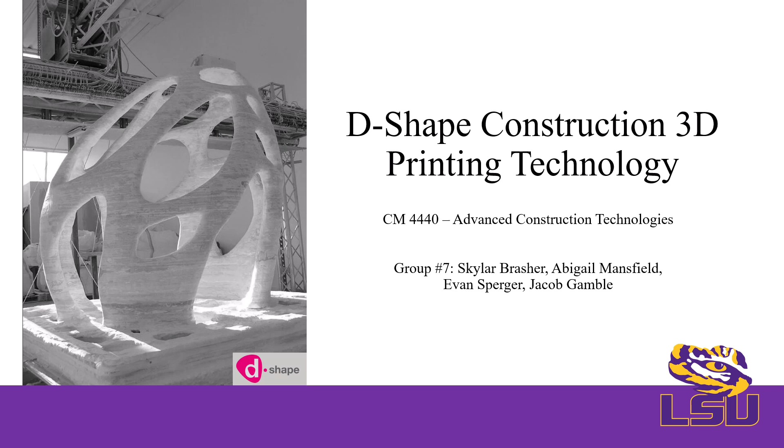Hi everybody, and welcome to D-Shape Construction 3D Printing Technology. This is a final presentation for CM4440, Advanced Construction Technologies. And this presentation is by group number 7, which includes Skylar Brasher, Abigail Mansfield, Evan Sperger, and Jacob Gamble. Let's jump right into it.

2006. The following year, 2007, Enrico printed the iconic Radiolaria Pavilion, the world's first 3D printed architectural structure. This marked a new era in construction technology. So Enrico would go on to showcase D-Shape's immense potential through a variety of visually stunning projects. I won't get too much into them because that'll be covered in a different section. But the applications are definitely varying, that you can use it in a variety of projects.

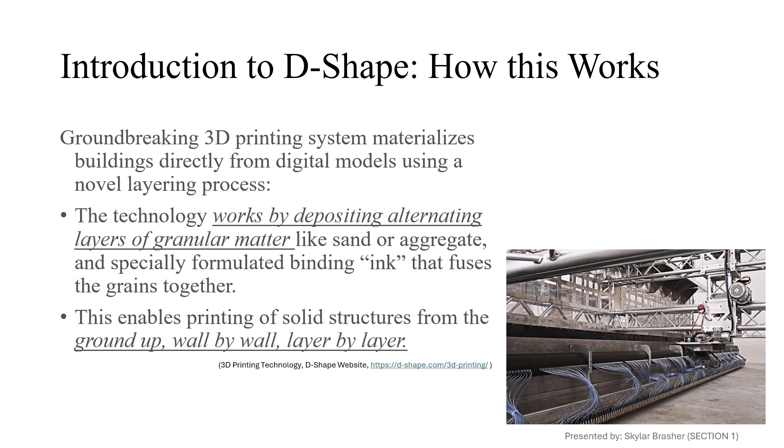I'm not sure if that's how this would work in the same way. But it does look like the bed has a specific technology in it that keeps the product from sticking to the bed. Very similar, just looks scaled up and it uses different materials, but I think that is definitely the basis of where this is coming from, or this could be the basis of the non-commercial one, but very similar.

While traditional 3D printers use tiny inkjet style binder jets, D-Shape's nozzles dispense small volume drops that rapidly bind large areas. This is due to the potency of the ink. You don't have to have a whole bunch of it for it to work well. Two robotic gantries work in sync, one precisely spreading each fresh layer of granular matter, so the sand and aggregate, the other following behind to print the binder patterns with the ink.

D-Shape is multi-material. It's compatible with a wide variety of aggregates, fibers, and customizable binder chemistries. This just means that we can go in and use specificity to try and find the right fit for the right project. Say that we're wanting something as a specific kind of aggregate for the project that we're doing, we can actually specify, pull it out, and use what we're wanting.

So this patented approach allows printing entire building structures in one seamless process. Complex shapes with fine details are no problem. This is due to the digital precision and design freedom. The printing progression is also self-supporting, removing the need for any temporary formwork. Again, going back to how non-commercial 3D printers work, I think this is very similar.

So say that it's something that's hollow and needs supports from the inside. With a non-commercial 3D printer, it would actually print the supports and make them where they're breakable. It would add a seam where it breaks off. At this level, at this scale, I'm not sure that it would work exactly the same, but I'm assuming that it would work very similarly.

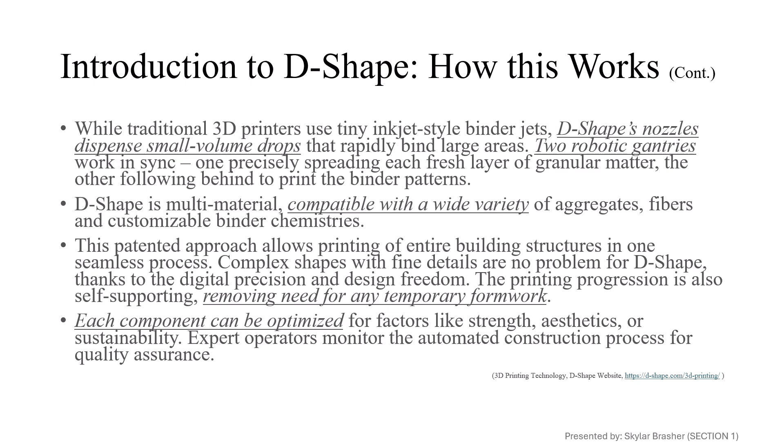Each component can be optimized for factors like strength, aesthetics, or sustainability. Again, going back to the variety of aggregates, fibers, and binder chemistries. Expert operators monitor the automated construction process for quality assurance. In this section, we'll be discussing the advantages and disadvantages associated with D-Shape 3D printing.

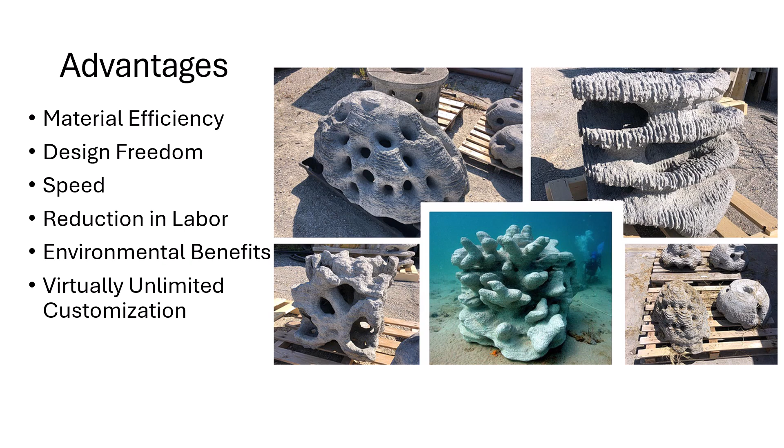Beginning with the advantages, we have material efficiency, design freedom, speed, reduction in labor, environmental benefits, and virtually unlimited customization. And to elaborate on these, beginning with material efficiency, only the necessary material is used. There's no need for any formwork or molds because the printing progression is self-supporting. In addition, it uses inexpensive natural materials such as sand or crushed stone, which can be optimized for strength, aesthetics, or sustainability.

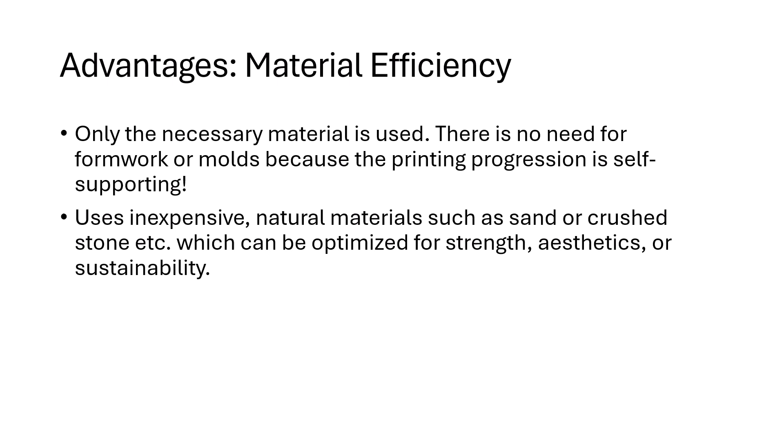Another advantage is the design freedom and customization. As you can see in the picture below, complex shapes can be created with ease. This leaves opportunity for architects and designers to create forms that would likely be impossible or at least very expensive using traditional methods.

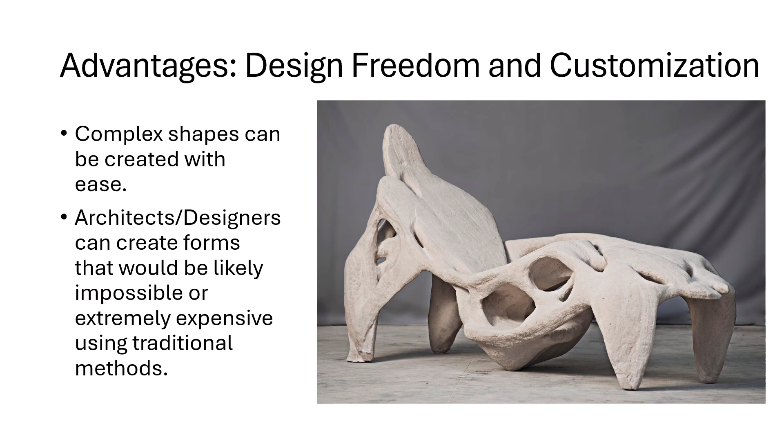Additionally, we have speed and reduction in labor. Along with the ability to create complex shapes and objects, large structures can be printed relatively quickly when compared against traditional masonry and concrete construction. Moreover, a single operator can operate the entire printing procedure, which requires significantly less manpower than traditional methods of concrete construction.

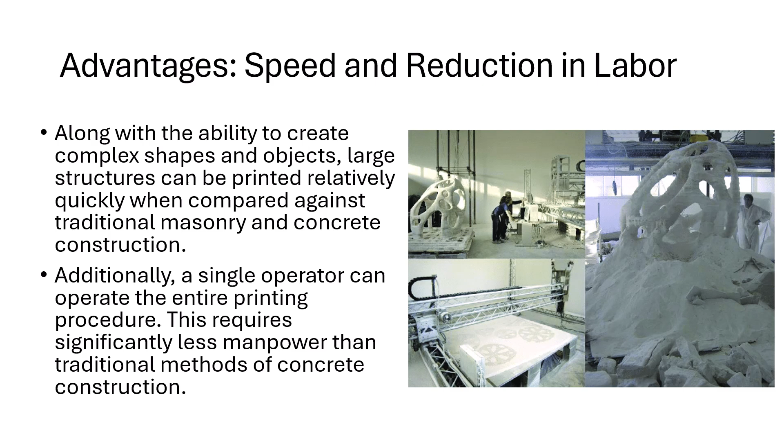Environmental benefits, such as reduction in material waste, less energy consumption, potential use for recycled materials, and less transportation impacts on the environment from carbon emissions, are another advantage of the D-Shape 3D printing process.

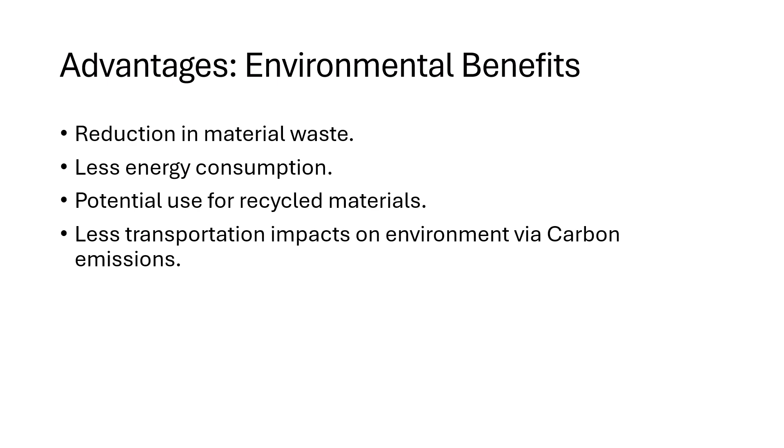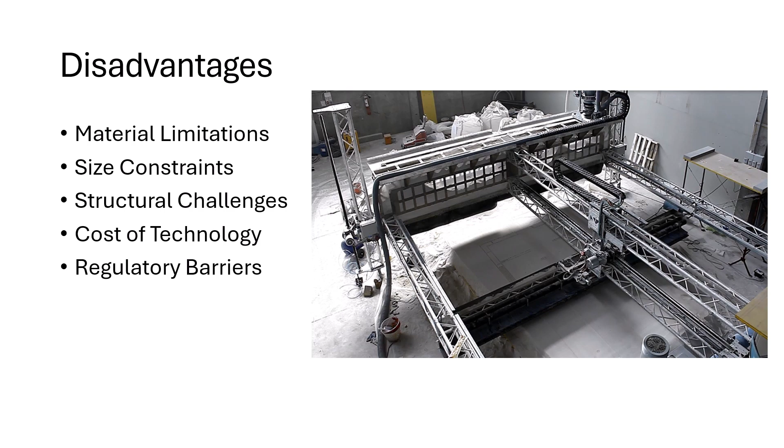Moving on to disadvantages, we have material limitations, size constraints, structural challenges, cost of technology, and regulatory barriers. With material limitations, this is a disadvantage because strength and durability depend on the binder and aggregate being used. Generally, this isn't as strong as traditional reinforced concrete, and this is due to the fact that there's no pre-mixing of the material and the liquid, which causes the components to bond differently than a typical concrete paste.

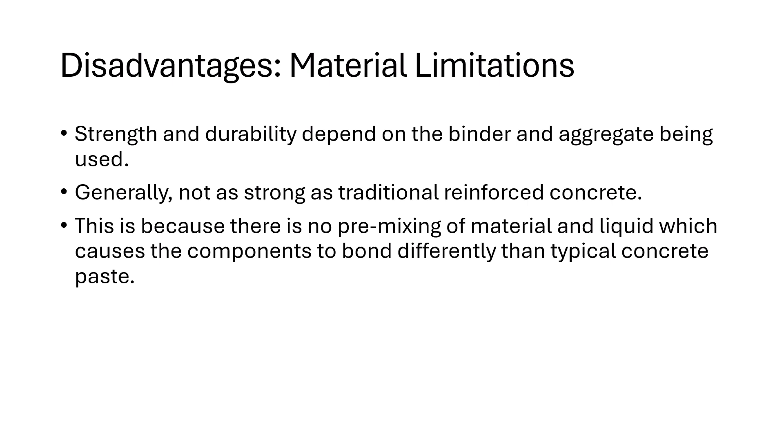So usually you'll have the dry materials mixed together and then a binding agent, whereas in typical concrete everything's all mixed together and it's all wet and creates a paste. So this is what causes it to not be as strong as traditional concrete.

Size constraints. Although the printer is large, its size limits how big of a structure it can print. So modular construction would likely have to be the method if a large structure was being printed. This would be a great option for prefabricated items such as wall panels or any sort of prefabricated thing where you could print it off-site and have it shipped to the job site to be put together modularly.

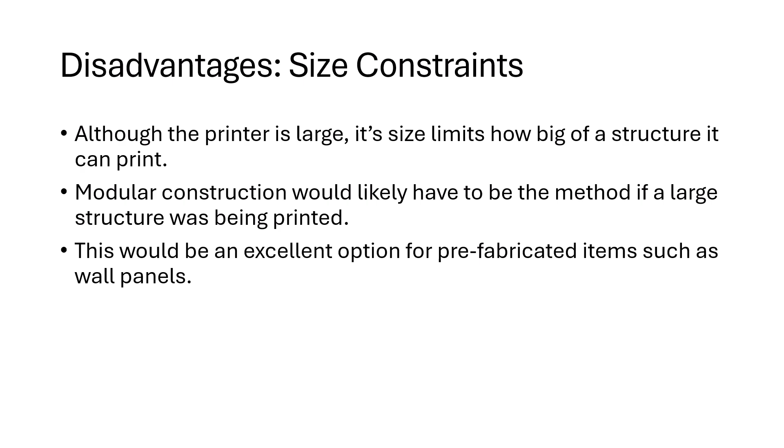Additionally, we have structural challenges. Complex structures will also need to have reinforcement, i.e. rebar, which is not something that is easily integrated into the 3D printing process. There can also be issues with adhesion of the layers. Delamination can occur, which can reduce the overall strength. There's also some fragility during the printing process while the material cures and hardens.

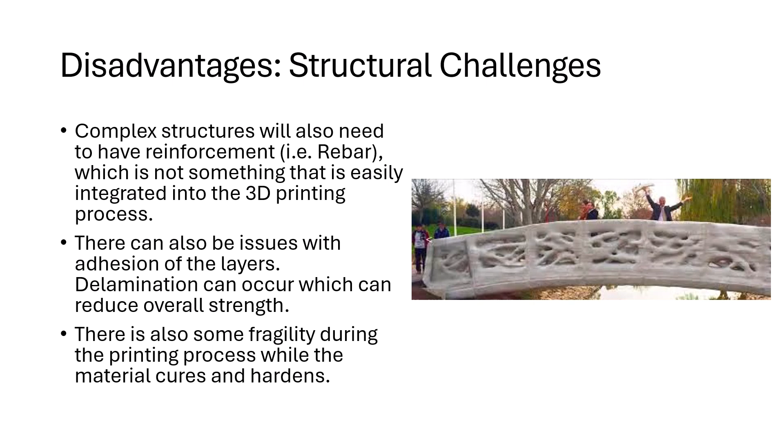Lastly, we have the cost of the technology and regulatory barriers. These printers are not cheap, very expensive upfront costs and the operational costs for the printer. These costs include software costs, skilled labor costs because it takes a special person to understand how to actually operate this machinery, maintenance and downtime. Downtime, especially when it runs out of material and you need to load more into it. Setup and calibration, all of this takes time and there's costs associated with that time.

Regulatory barriers can cause issues because there are very few established standards which can make getting permits and insurance difficult. Pilot projects often have to get special exemptions, i.e. experimental construction permits, in order to be able to use something like this.

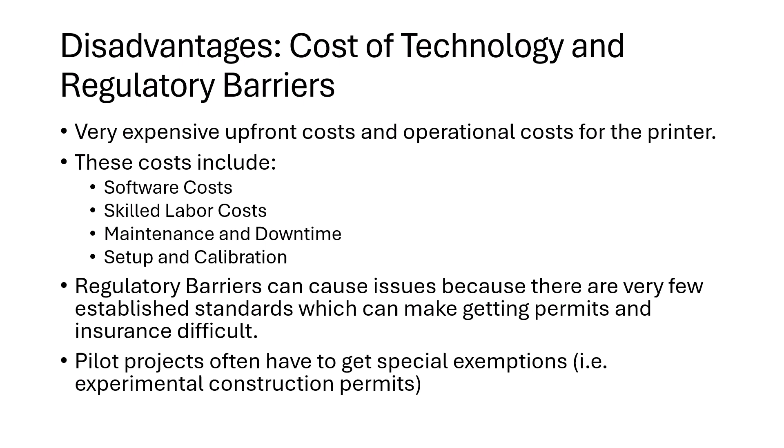There are a few applications of D-Shape 3D printing that will be discussed. The first being a collaboration between D-Shape and Triennale Milano in 2010. In this collaboration, they printed the world's first house that was entirely 3D printed in a single process. This house was called Una Casa Tutta di un Pezzo. As you can see from the photo in the lower corner, there were 4 walls and a roof constructed on this house, along with a few window openings.

It was 2.4 meters by 4 meters and included a bathroom, a kitchen, and a bedroom. And construction from start to finish took about 3 weeks. If you remember this slide coming up on some future slides, you'll be able to see how this technology has progressed over the years and how it has continued to speed up the construction process. This application demonstrates the potential of 3D printing for a rapid, efficient housing solution. It also highlights the ability to produce complete structures in a single and uninterrupted process.

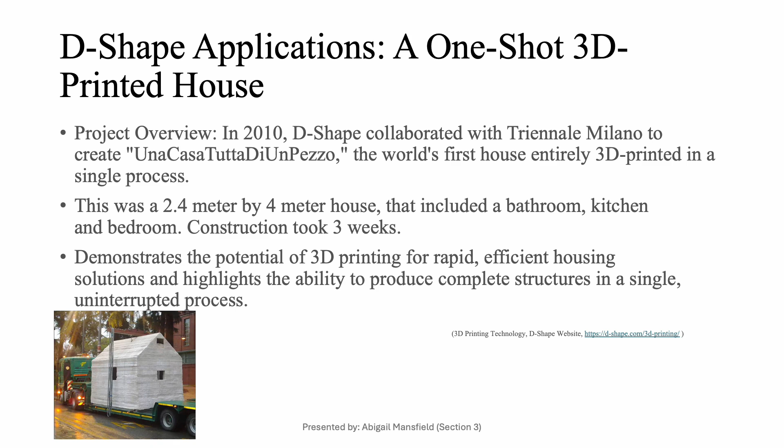Another application helps to highlight the sustainability aspect of this printing process, especially in urban settings. A study was published in the Journal of Cleaner Production, which explored the application of D-Shape 3D printing in constructing a fiber-reinforced footbridge to emphasize sustainability. In order to emphasize sustainability, they used the D-Shape technology as it enables a precise material placement to minimize waste. It also allowed them to produce a high compressive strength to enhance the durability by reducing the tensile stress to be resisted through the fiber reinforcement.

A few of the implications this specific application has for D-Shape construction is that it shows the potential to revolutionize infrastructure projects by combining sustainability with structural integrity. And it also opens avenues for eco-friendly construction practices in urban development.

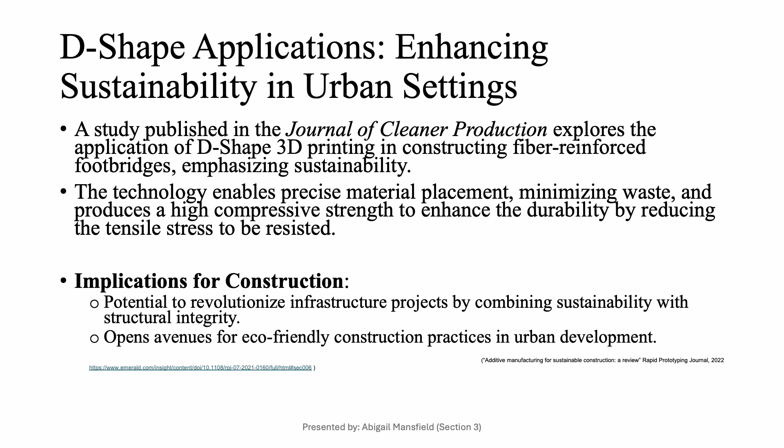As mentioned earlier, there are a few emerging global application cases that help to show how this technology has progressed over the years and how it has continued to speed up the construction process. One example of this is in 2016, there was a multi-story building 3D printed in Shanghai by WinSun, and this building was then later assembled in Dubai for use at the Museum of the Future.

This structure was 242 square meters, which if you think back to the initial house that was built, that was about 8 meters squared, and it was printed in 17 days and then later assembled in 2. That initial house took 3 weeks to build, and this took 17 days, so a significantly larger structure was printed in less time, only 6 years after this technology was used to build the first home.

The cost for this structure was $140,000. It did cut the labor cost by 80%, and the material waste was reduced by 60%. Again, this is why it was used in the footbridge example to help increase the sustainability of construction. There was also an earthquake-resistant house built in China. This house was 400 meters squared, and it was built in 1.5 months. So for nearly double the size of the multi-story building in Shanghai, and in twice the time you have a structure built.

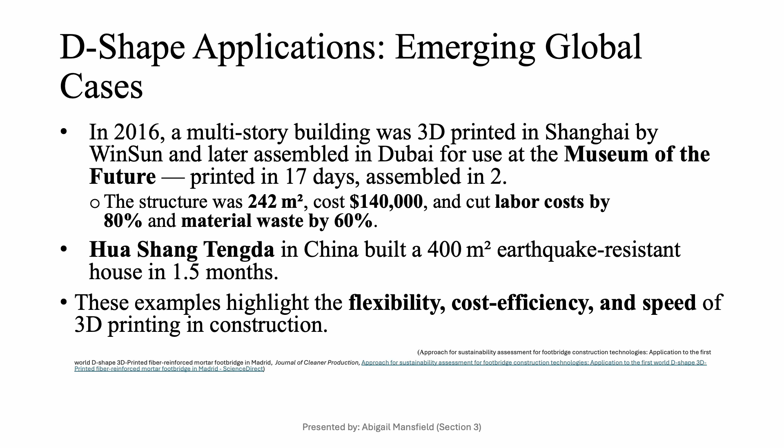Both of these examples help to highlight the flexibility, cost efficiency, and speed of 3D printing in construction. Not only that, but again, they help to highlight the sustainability aspect of this technology and how it can help reduce material waste through that precise material placement.

Contour crafting refers to a special form of 3D concrete printing. In this process, an extruder nozzle attached to a gantry crane is used to apply a concrete mixture. The crane or extruder nozzle travels along a digital floor plan of the building object and places layers of concrete on top of one another. The term contour crafting is trademarked by the Contour Crafting Corporation, which was founded by Dr. Khoshnevis. The company began researching direct concrete 3D printing using extruders in 2008, which led to other leading manufacturers in the concrete formwork industry to begin developing such forms of 3D printing.

Contour crafting has a lot of benefits for architecture, allowing companies to print buildings or any infrastructures directly on place. It can become a common method to help in building construction for people in need, like houses or buildings, especially after traumatic events. These machines are capable of printing in any urban setting or any infrastructure setting as well. As printing projects is one advantage, it also allows us to create more complex designs not capable with traditional construction methods.

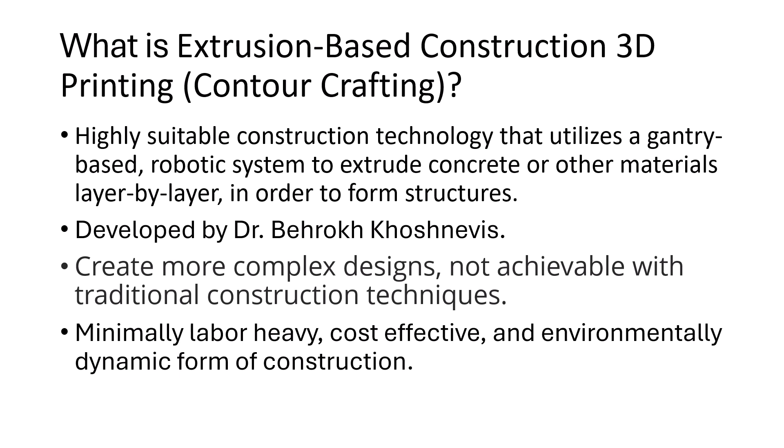Although there have been some improvements in developing and implementing large-scale 3D printers in the construction industry since earlier attempts, the extrusion-based method still confronts a number of challenges. Such challenges mainly are caused by limited material performance of concrete. Concrete, used in extrusion-based technologies, is in its early stages of development and does have promising potential of improvement, but does not yet have comparable consistency and viscoelasticity property usually exhibited in polymer materials. This issue is due to the fact that material needs to go through a liquid stage and hydration process to be solidified for successful self-supporting.

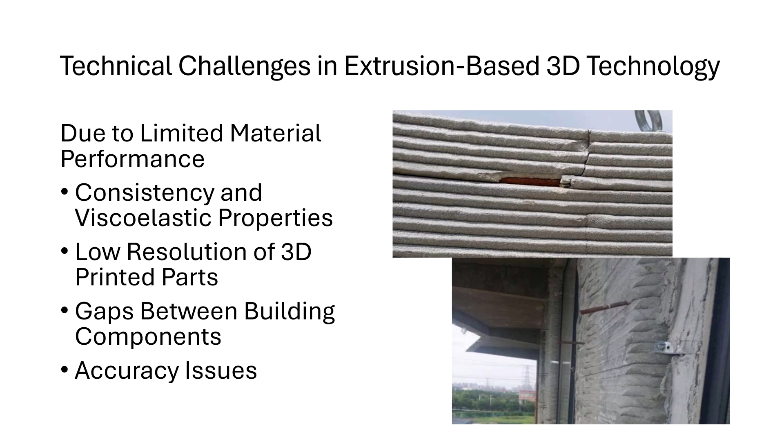Such large thickness of concrete filament may serve its purpose of expediting printing speed, but limitations in material level, as mentioned, are what really limit the thickness of concrete filament. Low resolution of 3D printed parts is also what limits the application of extrusion-based technology. The gaps in between 3D printing and the other building components, such as mechanical, electrical, and plumbing, are not necessarily required to be filled out, but certain joint systems are required to overcome compatibility issues. A dedicated joint system utilizing other means of 3D printing technologies is to either be integrated during the printing process or post-integration via the construction process. These methods could be used as an alternate solution.

Current research into the extrusion-based process is mainly focused on advancements in process competence aiming to achieve improved performance from the printed components, extension of material availability to increase system integration in extrusion-based processes, numerical analysis to analyze and predict the physical properties of materials, and modeling and simulations of the dependence of material performance on designs and printing strategies.

Thanks to the recent developments in digital technologies, the potential and performance of extrusion-based technologies is expected to increase. Such developments are anticipated to increase the suitability both of the technology and of the materials, extending the areas of application of this technology and enabling a quality of printed parts that is comparable to that of conventional construction methods. The contribution of machine learning to extrusion-based printing extends to the control of process parameters and print positioning, predicting cost and energy consumption, and process monitoring. Machine learning technology has great potential to overcome this complexity, enabling a more reliable prediction of energy consumption and cost in extrusion-based manufacturing.